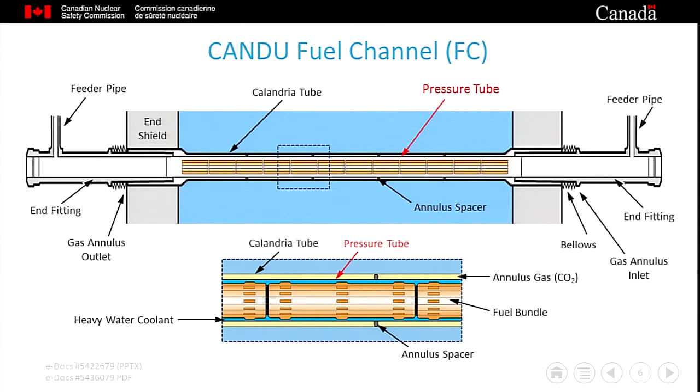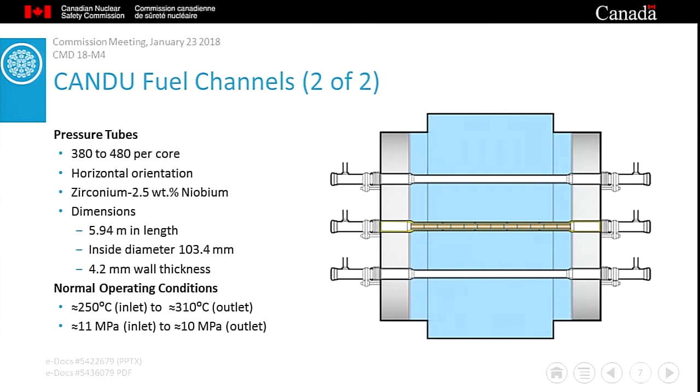The pressure tubes are tightly positioned within the reactor vessel by heavy stainless steel end fittings, which also allow for coolant flow to and from the pressure tube through feeder pipes. The number of pressure tubes varies from as few as 380 in Pickering B units to 480 in the Bruce and Darlington units. Please see the appendix for more details about Canada's CANDU fleet. The conditions under which pressure tubes operate also vary according to the vintage of the reactor design, with lower temperatures and pressures in early CANDU units like Pickering A and higher values in the Darlington units.

Before proceeding to a description of the pressure tube degradation and how CNSC staff regulates safe operation, I'd like to review some key concepts. Any conversation about pressure tube technology will touch on a number of interrelated themes. But rather than review all of them, I will touch on three. By doing so, I hope to offer some context for today's presentation, as well as prepare the Commission members for discussions they may hear during the upcoming Bruce and Pickering Part 1 hearings.

In the next few slides, I will briefly address three concepts. First, what do we mean by the phrase fitness for service? Second, I'll quickly discuss the presence of hydrogen in pressure tubes and the uptake of its sister isotope, deuterium. Finally, in any discussion about pressure tubes, people will frequently refer to two units of operating time, and I'd like to clarify the distinction.

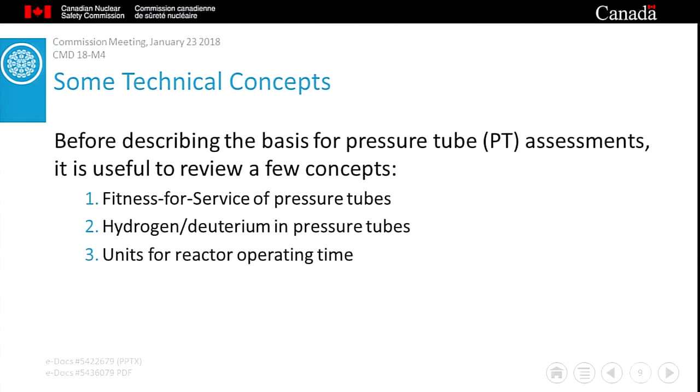The first concept is pressure tube fitness for service. In a CANDU reactor, high-temperature pressurized coolant flows through a number of components, collectively known as the primary heat transport system. Because this system is responsible not only for collecting heat from the nuclear reaction, but also efficiently transferring heat to the secondary system via steam generators, the integrity of the primary heat transport system is vital. This is especially true of the pressure tubes, which contain hot fuel. The CANDU safety case relies on pressure tubes to remain leak-free under normal operating conditions and to maintain fuel cooling under postulated accident conditions.

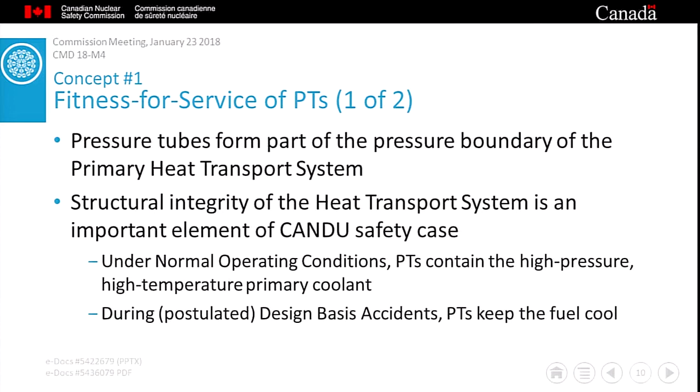When CANDU engineers designed pressure tubes, they had a specific goal in mind. Over their lifetime, the tubes would exhibit an extremely low probability of failure, irrespective of whether they were subject to normal operating conditions or accident conditions.

With this in mind, the engineers incorporated redundancies into the pressure tube design. First, they designed the pressure tubes not to leak. However, bearing in mind that pressure tubes might experience in-service degradation leading to a crack, the designers deliberately incorporated features to make pressure tubes resistant to unstable cracking.

Once pressure tubes have been fabricated, installed, and commence operation, one might ask, can they still perform the way the designer originally intended? So when staff reviews a licensee's fitness for service assessment, our goal is to answer that question. Before leaving this slide, I'd like to clarify the phrase in-service degradation. For the rest of this deck, I will use it to describe degradation that occurs as a result of reactor operation.

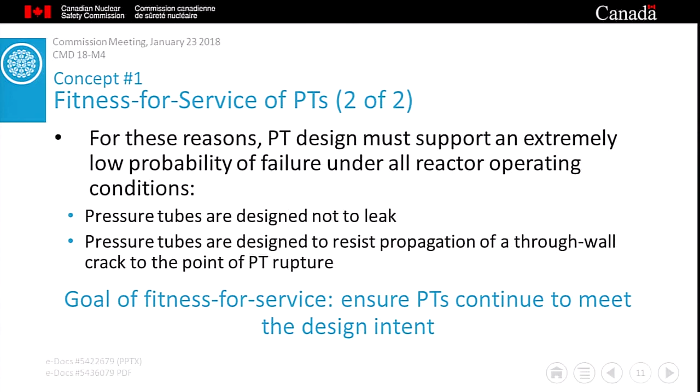At this point, it's important to distinguish between the two types of pressure tube assessments that CNSC staff review. First, assessments that are done to confirm that inspected pressure tubes are fit for continued service. In accordance with their license condition handbook, a licensee is obliged to conduct periodic inspections and compare the results against CSA acceptance criteria. If the inspection finding does not meet those criteria, the licensee must submit a fitness for service assessment for the inspected pressure tube for CNSC acceptance. These assessments cover approximately 30% of the pressure tubes in service in Ontario.

In addition, CNSC requires that licensees perform pressure tube risk assessments to address the 70% of tubes that have yet to be inspected. These assessments include two that I will describe in more detail in just a minute, namely leak before break assessments and fracture protection assessments. Both leak before break and fracture protection assessments start from a worst case assumption that somehow a crack has occurred in a pressure tube without operators being aware of it. The licensee then calculates the probability that the hypothetical pressure tube will rupture. All of the assessments must meet the acceptance criteria established in the compliance verification criteria of the License Condition Handbook.

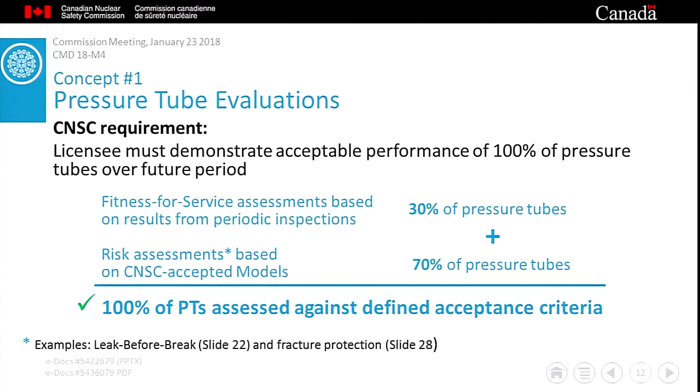Based on the results of these assessments of both inspected and uninspected pressure tubes, CNSC staff assembles a composite view of the safety of 100% of the core. As a second concept, I'd like to discuss hydrogen and deuterium in pressure tubes, because we'll see that this is an important issue in the concept of fracture toughness, which we'll be discussing in a minute.

While there are 3 hydrogen isotopes, only 2 of them really have an impact on pressure tubes. Hydrogen, whose chemical symbol is a capital H, is built into every tube during its manufacture. And deuterium, symbolized by capital D, is picked up by pressure tubes when they're in contact with high temperature heavy water. Corrosion reactions result in two things. First, a thin layer of oxide appears on the pressure tube surface, and second, a small amount of the deuterium from the corrosion reaction finds its way into the tube.

The amount of deuterium is so small, it is reported in parts per million. For simplicity, rather than talking about a given pressure tube having so many parts per million of hydrogen and so many parts per million of deuterium, industry rolls the two into a single value and talks about the hydrogen equivalent concentration, or HEQ. So for the rest of this presentation, you'll hear me talk about HEQ.

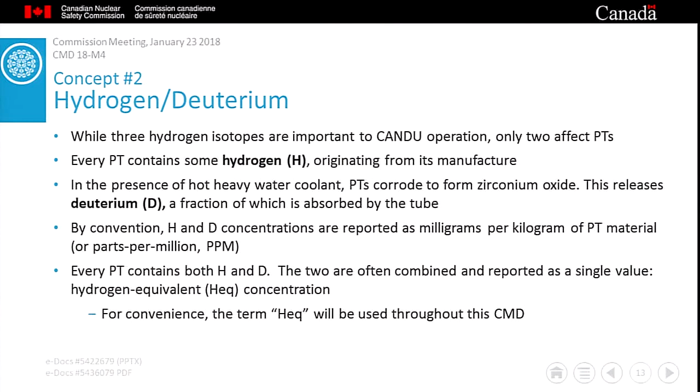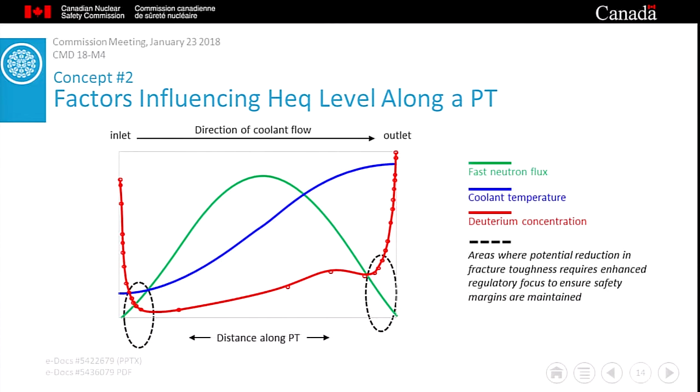Knowledge of this behavior is important for pressure tube assessments. In particular, hydrogen equivalent concentration is a key parameter for establishing the fracture toughness of a pressure tube. Hence, the circled areas at the end of the pressure tube indicate places that require enhanced regulatory focus because of reduced fracture toughness. And I'll be giving you much more detail on that in a couple of slides.

Finally, I'd like to distinguish between two units of reactor operating time that Bruce and Pickering representatives may use during the Part 1 relicensing hearings. Hot hours, which is the cumulative time the primary heat transport system is above about 200 degrees C, and effective full power hours, which is the fraction of the hot hours when the reactor is at full power. Each of these units has a slightly different application. To illustrate the difference between the units, the slide indicates the number of hot hours in a calendar year and the corresponding effective full power hours for a typical Canadian reactor.

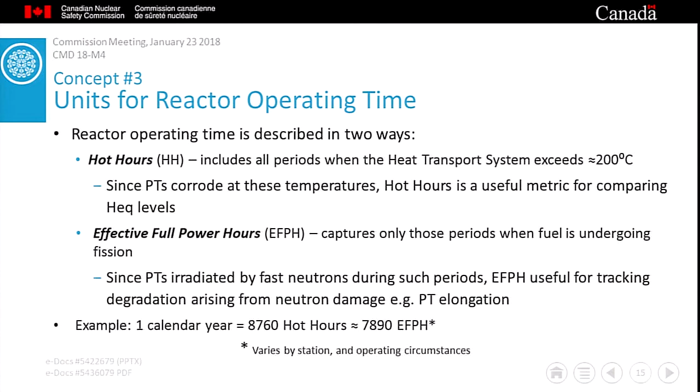Under the influence of high coolant temperatures, high pressure, and bombardment by energetic neutrons, pressure tubes experience a number of types of degradation. These include changes in dimension, for example, elongation of the pressure tubes, contact or interference with other reactor components, for example, the liquid injection shutdown system nozzles or LISS nozzles, flaws in pressure tubes, and changes in the material properties of the tube, such as fracture toughness.

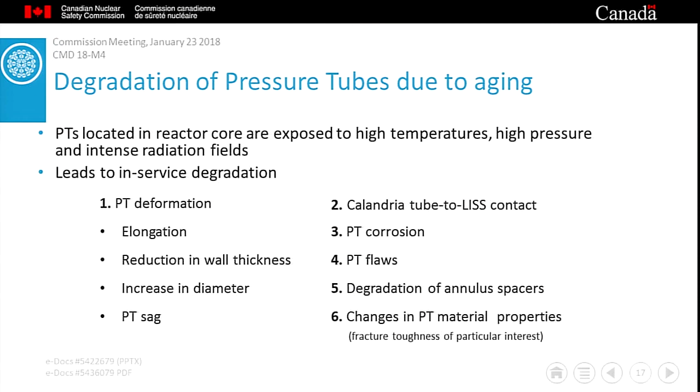It is important to recognize that when they designed the CANDU pressure tube, engineers took most of these degradation mechanisms into account. Specifically, they deliberately compensated for the potential impact of certain kinds of degradation by over-designing the tube. I'd now like to switch gears from a purely technical discussion of how pressure tubes work and how they age to a summary of CNSC staff's oversight of licensee performance under the Fitness for Service Safety and Control area.

This slide offers a high-level summary of key elements of CNSC's regulatory oversight of pressure tube degradation. To comply with CNSC requirements, licensees are obliged to understand each pressure tube degradation mechanism, to make appropriate plans to assess the risk posed in their particular units by each mechanism, to perform inspections and material surveillance to confirm the extent and severity of the mechanism in their particular units, and finally, to use the collected data to demonstrate that affected pressure tubes will continue to meet acceptance criteria into the future.

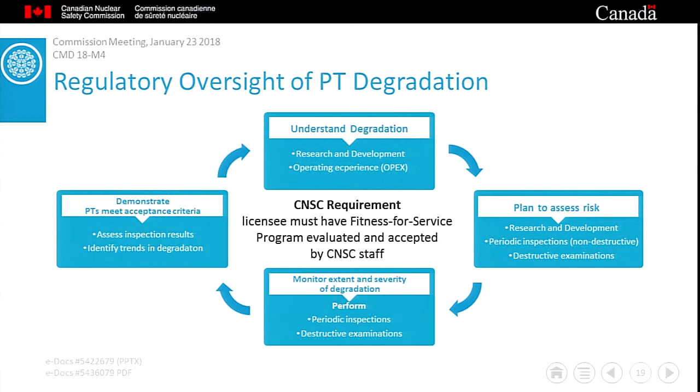And that's an important point. When staff looks at fuel channel fitness for service, pressure tube fitness for service assessments, we're not interested primarily in what's happening today. We're always forward-looking. To illustrate how CNSC staff's oversight process works, I'd like to take a closer look at two examples. First, a form of degradation where CNSC requirements oblige the licensee to prepare a fitness for service assessment based on in-service inspection data. So for this example, we'll look at pressure tube flaws.

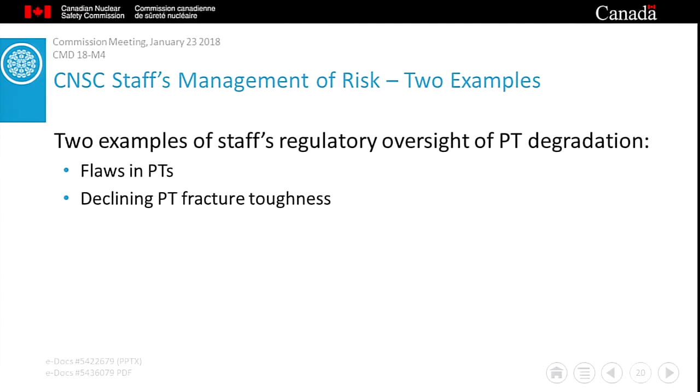Second, a mechanism that by its nature cannot be measured in service, and that's fracture toughness. As we'll see in a few minutes, licensees use predicted fracture toughness values as a basis for core-wide assessments of the risk of operating uninspected pressure tubes. Let's start with example 1. The vast majority of pressure tube flaws are fairly innocuous. Once created, they exist as mere blemishes on the pressure tube surface, having neither economic nor safety implications. However, a very small fraction of flaws could potentially have serious consequences.

First, the flaw is created during normal reactor operation. If local stresses and the hydrogen level are appropriate, this flaw can become a small crack. And one mechanism capable of doing this is referred to as delayed hydride cracking, and that's symbolized as DHC. Under certain circumstances, this crack can grow through the pressure tube wall, allowing pressurized coolant to leak into the leak detection system. Finally, under specific conditions, it's conceivable that that same through-wall crack could extend along the length of the pressure tube. And at this point, the CNSC defines two possible outcomes. We can either have leak before break, which is the target that all licensees are expected to meet, or we can have a condition referred to as break before leak.

Before we leave this slide, it's important to recognize two things about the Canadian fleet. First, no Canadian pressure tube has exhibited active cracking since 1986. And second, while some Canadian pressure tubes have demonstrated leak before break, only one tube has ever exhibited break before leak. That was in 1983, and it involved a pressure tube material that is no longer in service in Canada.

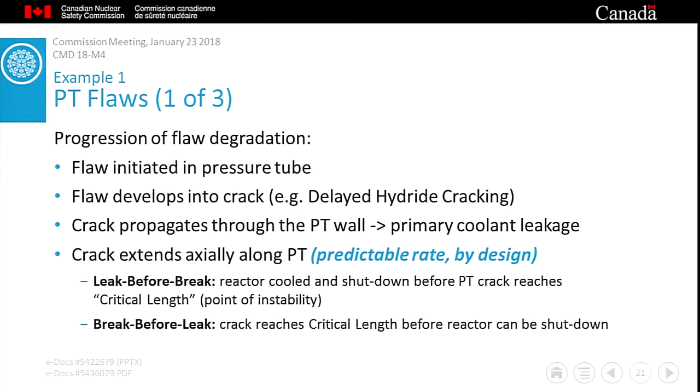In accordance with CSA standard N285.4, the licensee must periodically inspect a sample of their pressure tubes to look for flaws just like this. If the flaw meets CSA acceptance criteria, the pressure tube is considered unconditionally fit for service. On the other hand, if the flaw does not pass those criteria, the licensee must submit a fitness for service evaluation, basically a detailed assessment of the risk that the flaw could initiate delayed hydride cracking at some point. The assessment not only covers the present time, but a defined period into the future.

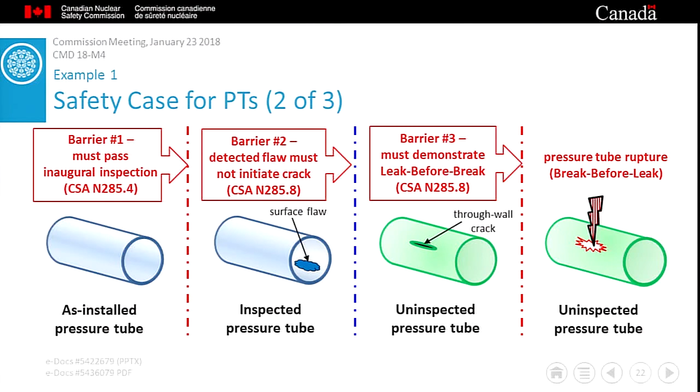Notable examples include the preparation and submission of periodic inspection program plans, which detail the scope and schedule of pressure tube inspections, and the preparation and submission of fitness for service assessments done in accordance with the CSA standard and providing detailed analysis supporting a claim that the pressure tube can be safely operated into the future.

We have now seen how CNSC staff assesses one type of degradation identified during periodic inspections of pressure tubes. I'd now like to contrast that with a second kind of assessment, aimed at quantifying the risk of continued operation of pressure tubes for which no inspection data is available. One example of this is fracture toughness, a key property of pressure tubes.

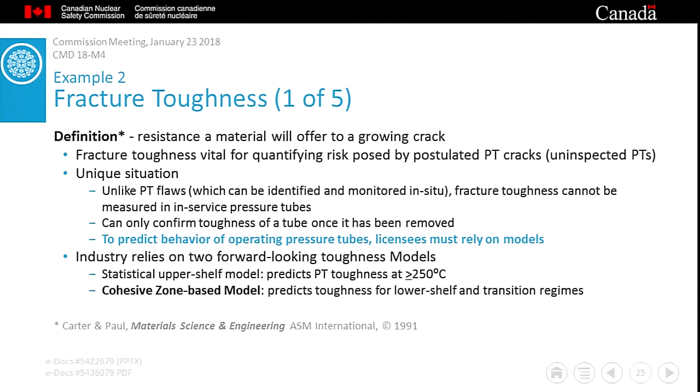As the temperature rises, the material toughness increases dramatically, and the fracture behavior transitions from brittle to ductile. A good analogy is a garden hose. In the middle of the winter, for example, when you're flooding a children's hockey rink, the hose would easily rupture if you accidentally opened the tap a little too quickly.

However, when spring temperatures arrive, a sudden pressure increase might make the hose leak a little bit, but it would not rupture. Returning to the example of reactor pressure vessel steels, once the material reaches upper shelf temperatures, it exhibits purely ductile behavior. The fracture toughness is quite high, so even if a crack existed, the tube would resist its growth. Under these conditions, the crack will not grow unless the load is increased.

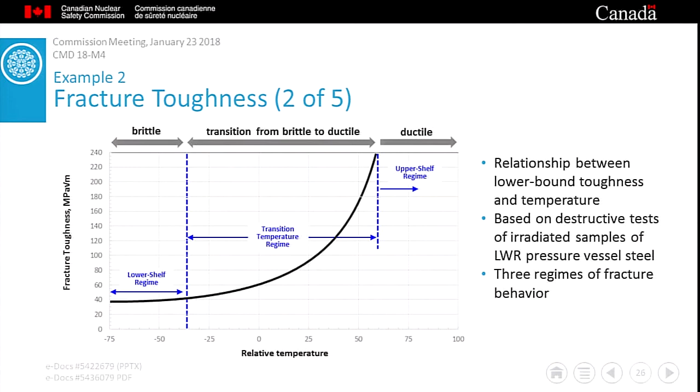This last regime is where CANDU pressure tubes need to be operated. This ensures that the crack resistance of the tubes will be at a maximum in the event of a design basis accident. One might ask, do Canada's pressure tubes still have sufficient toughness to safely perform their design function? And the answer is, for the near term, yes.

However, research and development has confirmed that as hydrogen equivalent levels continue to increase, pressure tubes will exhibit a steady reduction in toughness. To manage the risks associated with this decline, licensees must consider two requirements. First, during normal operation, 100% of the pressure tubes must be on the upper shelf. Fortunately, research has shown that neither hydrogen levels nor temperature affect the pressure tube behavior once you're on that upper shelf.

However, when pressure tubes are operated below 250 degrees C, for example during the heat up and cool down of the reactor, the situation is more challenging. Based on a detailed understanding of how toughness changes with both hydrogen content and temperature, operators must carefully control heat transport system pressure to ensure that at each step, pressure tubes will be sufficiently tough.

I'd like to take a moment to focus on that particular scenario, the heat up and cool down of the reactor. To ensure that they can meet a key CNSC requirement, licensees establish a so-called heat up cool down envelope, which operators must observe as they pressurize and depressurize the heat transport system.

To create this envelope, licensees employ a fracture protection assessment, which determines the maximum pressure that a postulated crack could sustain without becoming unstable. So again, I have to emphasize, this is looking at the worst case scenario. You have a crack in a pressure tube and you have not identified it. So to develop the heat up cool down envelope, the licensees start by assuming that there is a tube out there that has that crack.

A key input to this assessment is fracture toughness. As I mentioned earlier, the temperature range over which heat up and cool down occurs, known as the transition regime, is tricky because the toughness varies both with temperature and with hydrogen equivalent level. Early in life, it was pretty straightforward to devise a heat up and cool down envelope. Pressure tubes contained only a small amount of hydrogen, so they were pretty tough.

In contrast, steady increases in pressure tube hydrogen equivalent levels make the current situation a bit more complicated. With falling fracture toughness levels, licensees have found it more difficult to define a heat up cool down envelope that will allow them to pass a fracture protection assessment.

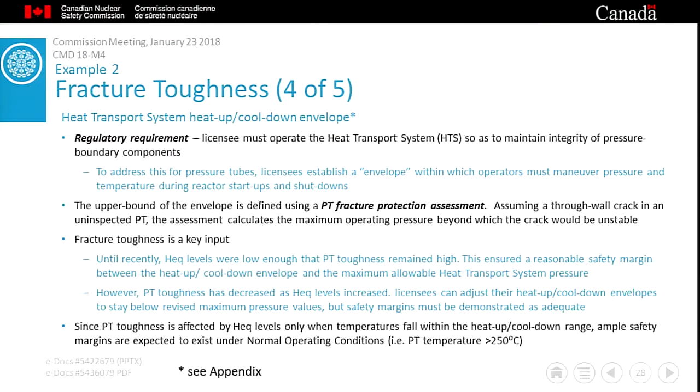In monitoring licensee management of this challenging situation, CNSC staff focus on the size of the safety margin, and that is the amount of space there is between the upper bound of the heat up cool down envelope and the maximum allowable pressure that's determined by a fracture protection assessment.

Finishing off with fracture toughness, I could repeat a similar table to what was shown in slide 24. But in the interest of time, I can simply confirm that the regulatory requirements governing pressure tube risk assessments are quite similar to those imposed on licensees when they do fitness for service assessments. And second, I can confirm that licensee performance in doing these risk assessments reflects a level of effort and focus comparable to the level that they devote to addressing fitness for service assessments.

Finally, I'd like to take this opportunity to compare CNSC staff's evaluation of the 2014 licensee request to operate beyond 210,000 effective full power hours with their current requests, which the Commission will be examining in the coming months, and that is to extend pressure tube life to beyond 247,000 EFPH.

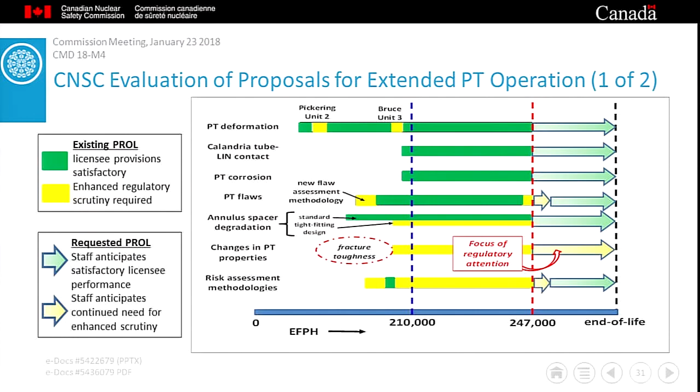Taking the issues in turn, with respect to degradation of tight-fitting spacers, industry has devoted considerable time and effort to this issue, and over the past 6 years it has borne fruit. Industry has removed and carefully examined in-service spacers, developed a suite of predictive models for their degradation behavior, and has begun preparing fitness for service procedures for publication in a Canadian Standards Association document. In short, staff rates industry's current performance as green, and we do not anticipate any downturn in industry's performance on this particular item.

In terms of proposed new methodologies for core assessments, leak before break, and fracture protection assessments, industry has submitted several technical basis documents and engaged in extensive meetings to address CNSC staff concerns. Based on this, 2 assessment methodologies have been accepted for use, and CNSC staff's review of a 3rd methodology is nearing completion. Overall, CNSC staff is confident that following a continued but brief period of enhanced regulatory monitoring, we will be in a position to rate industry's performance as green.

Finally, with respect to fracture toughness. While industry has completed considerable work over the last 4 years, there are outstanding issues with one of the models that they are currently using, for example, the treatment of uncertainties. As well, there are new issues, including the development of an extension to that model capable of predicting fracture toughness out to 160 ppm hydrogen equivalent, which is the new end-of-life target. For this reason, CNSC staff believes that this issue must remain yellow, and this will be reflected in the Commission member documents that you will be reviewing leading up to the relicensing hearings.

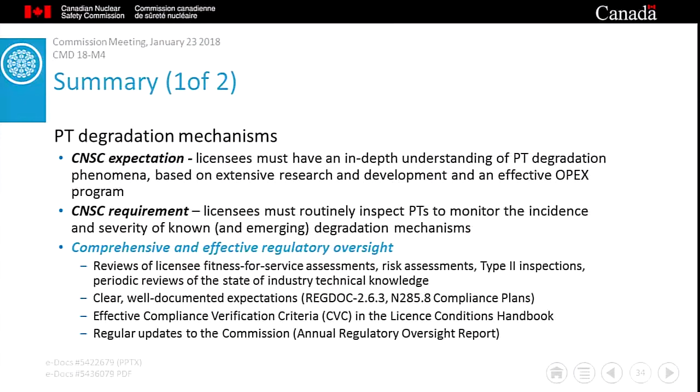To ensure licensee fitness for service programs for pressure tubes meet regulatory requirements, CNSC has a comprehensive and effective approach to oversight. We expect licensees to have an in-depth understanding of pressure tube degradation, and we require routine inspections of pressure tubes. CNSC staff has a comprehensive and effective regulatory oversight, and in particular over the proposed 10-year operating license requested by OPG and Bruce Power, staff intends to provide annual updates to the Commission via the regulatory oversight report.

In terms of fracture toughness, CNSC staff can confirm that research and development on the toughness issue continues under the joint Bruce Power OPG CNL project. Since the time licensees first requested Commission approval to operate pressure tubes beyond 210,000 effective full power hours to the present, CNSC's regulatory expectations have not changed. That is, licensees must routinely demonstrate that pressure tubes remain capable of meeting all of the original design intent. And finally, should the licensee propose revised or new fracture toughness models in support of future pressure tube operations, CNSC staff will expect them to demonstrate that the predictions are conservative.

That completes staff's presentation. We're available to answer any questions that the Commission members might have. Thank you for your attention. Thank you.